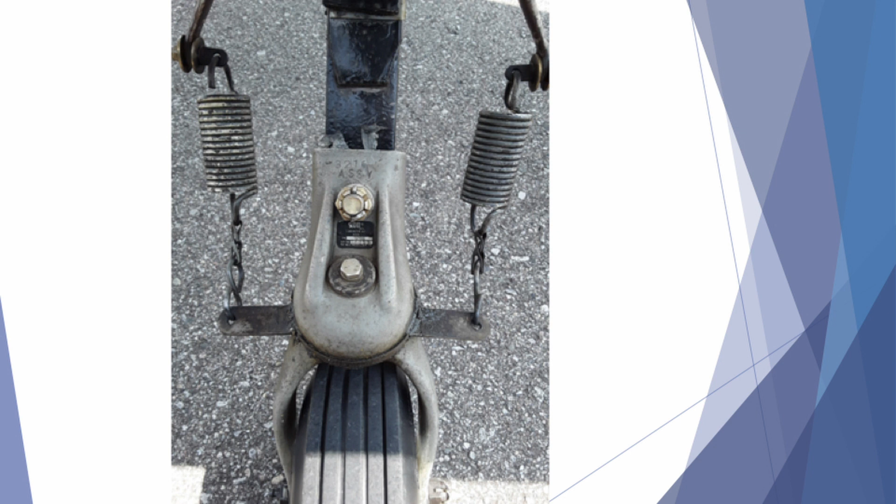Okay, tail wheel. If you look at the parts manual, the attach point for the tail wheel shows the bolt going one direction. The service manual shows the bolt coming up, holding it together, going the other direction. If you notice, it's not an elastic lock nut, it's a castellated bolt. That's the way it's supposed to be wired, and that's the way it's supposed to be installed.

You notice there's no grease zerk on this one. The grease zerk, if you take a grease gun and keep pumping grease out of it, the tail wheel's never going to lock straight for you. It's always going to kick loose. What we did is about every second or third annual, when it's up in the air with the tail wheel suspended, we'll take that off, clean it all out, put a thin film of Lubriplate on the little clutch plates, the friction discs, put it back together and tighten it up, and it's fine.

It doesn't need to be greased every year until grease is coming out of it. It doesn't help it. The chains and the springs should have a little bit of slack in them when they're sitting stationary. They shouldn't be under tension.

That'll give you about 15 degrees of travel with the tail wheel. Any more than that, you get full right rudder and tap the brake, you'll kick it loose into caster mode. If you've got tension on it all the time, you've got a preload on it and it'll break loose even easier, and it's a real bear in a crosswind. You don't want them tight.

So the rudder horn for the spring attach points, how were they set up initially? Did the springs hook directly onto that? The springs originally went up - see, I've got the eye bolts coming out of it, moving it in. All I did with mine is I got a little too carried away with it and I changed the steering ratio, so it kind of desensitized it. It's more of a linear push travel now.

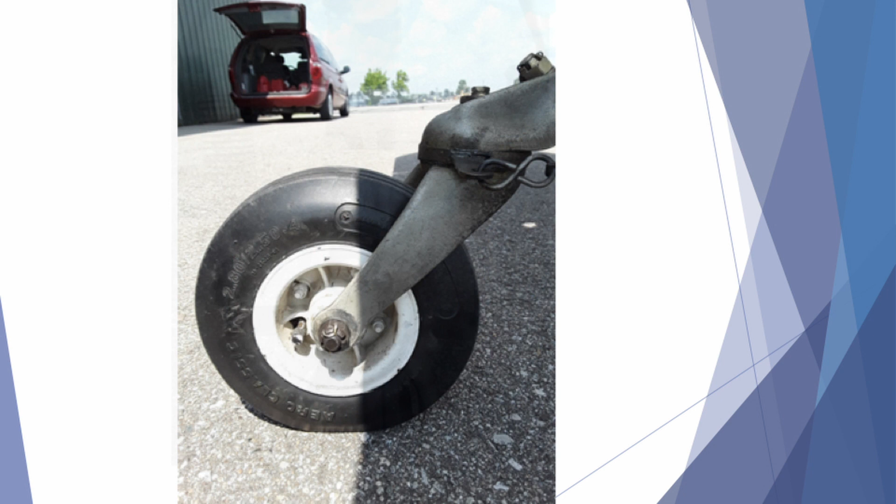Aero Classic makes that tire. It's almost a necessity for the Dash 3s with the big heavy tail - they've got a lot more weight on the tail sitting on the ground. If you drop a Dash 3 in with the old sawtooth pattern tires, you can pretty much guarantee you're going to blow the sidewall out of it, or if you let the pressure get down below 45, 50 pounds. These tires on a small tail, you could almost let the air out of them and use them. They're a much, much more durable tire.

When you do the annual on the airplane, you want to jack the tail up in the air where the tail wheel's hanging, where the tail wheel spring pushes up into the rear of the fuselage. There's a steel box in there, and it's a good jack point. Take a hydraulic jack, or have somebody lift it up, and put it on a little jack stand to get the tail wheel up in the air.

At that point, you can start shaking it side to side. With the airplane sitting on the tail wheel on a load, you can't tell if anything is loose back there. By putting it up on a jack stand and getting the tail wheel in free air, you can see if the bushing is worn, the bolts are loose, or the rubber coupling that goes up into that box. I've seen cases where guys took them apart for an annual and never even knew the rubber was gone — it's got a quarter-inch gap in there slapping around. That's a real son of a bitch to replace. It's not fun, yeah.

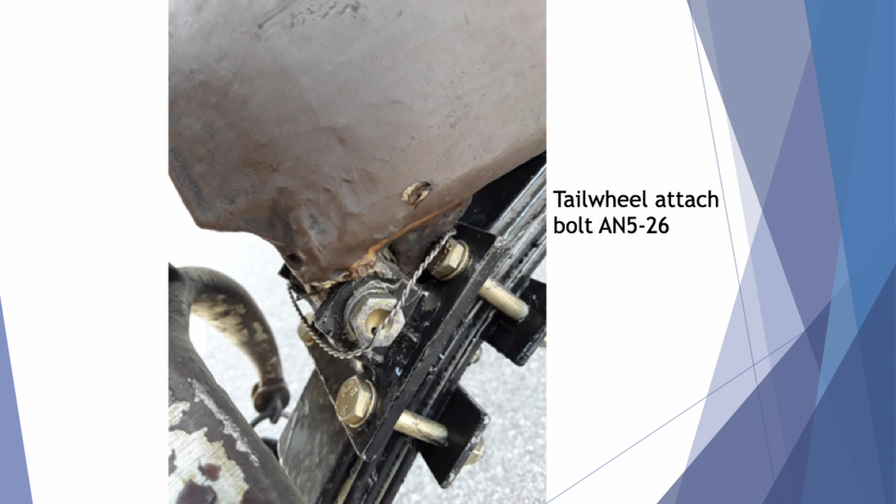Okay, the rear bolt — it's an AN 5-25 in the parts manual. What we found, whether that was a typo or something has changed, is that a 5-25 is real tight; it's not quite long enough. If you put a 26 in it, notice it doesn't have an A on it, so it's not an elastic lock nut type bolt — it's supposed to be cotter pinned. It's got an AN 310 castellated nut on the other side.

This is something I came up with on them years and years ago after I broke two bolts. I noticed you've got bolts with a plate, whereas the airplane that crashed initially had U-bolts. Yeah, this is a very, very early 108. Through the years, things have changed in them, and there's a lot of parts up in the wing that are completely different between an early 108 and a Dash 1 and 2. We'll get to that in a little bit here.

Now inside that bolt, there are two sleeves — an inner and an outer bushing — and a 5/16 bolt that goes through there. Guys will put elastic lock nuts on them and start reefing down on it if there's a little bit of play. That's not the way to fix it, because you're trying to squeeze a quarter-inch steel plate. The bushings are set up so that if you buy a brand new bushing from Univair, it's a little bit too long. Guys will grind them off, but no — that's where you put the shims.

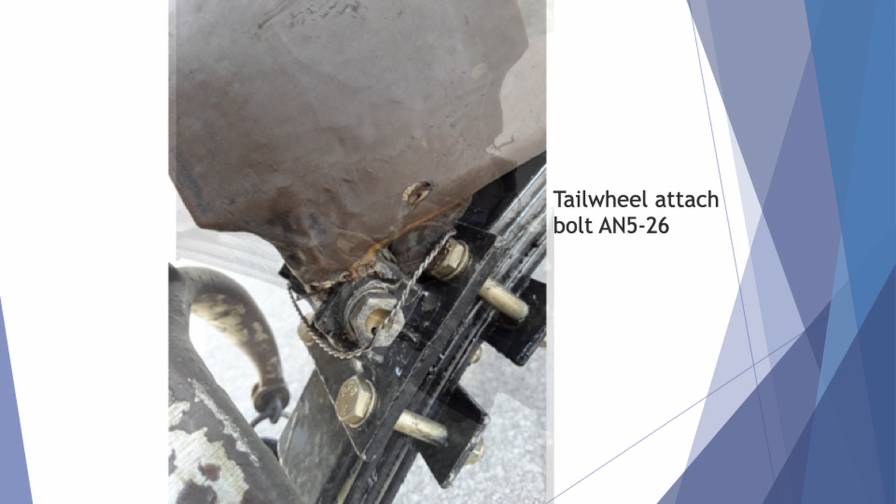This is the other side. The trick we figured out was you drill the head as well. Instead of putting a cotter pin in it, you come off the tail with safety wire, go all the way around the loop, through the head of the bolt, come back around, and safety it back through the same hole. So now you've captured that bolt.

If you're out somewhere and you snap the head off that bolt from a real bad crosswind taxiing — picture that 5/16 bolt, and you're trying to taxi a 108-3 with all that side load on the tail. It's all being transmitted to that little 5/16 bolt. If you pop the head off, there's nothing stopping that bolt from coming out the other side. When that happens, your tail wheel leaves. By capturing it with the wire, you'll catch it on a pre-flight. If you break the head or the tail of the bolt, the safety wire will hold the remaining portion into the bushing, and it won't come out.

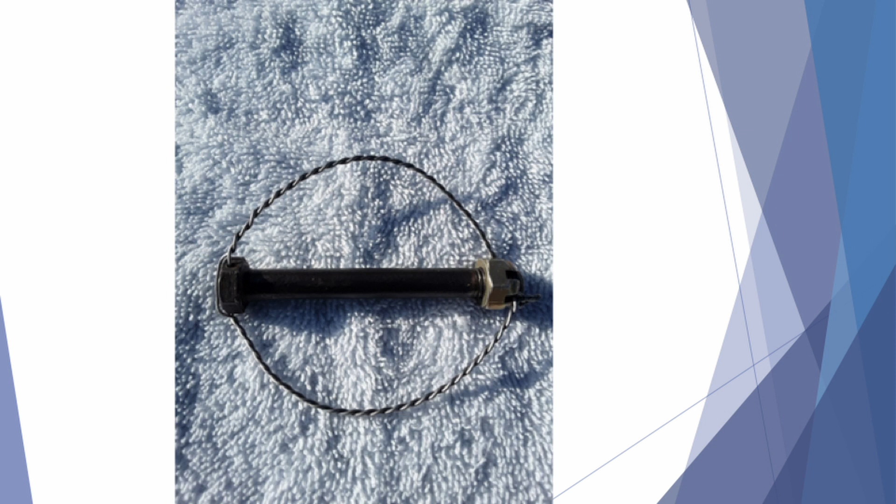That's what it looks like off the airplane. I've got one up here. You guys can come look at it after the presentation. It'll give you an idea how to do it.

It's like Murphy's Law - if you safety it, double safety it like that, you'll probably never break it again.

This is the weak link that nobody ever looks at, the flap return spring up in the wing. There's an inspection hole underneath the flap bell crank frame, and you can look at it.

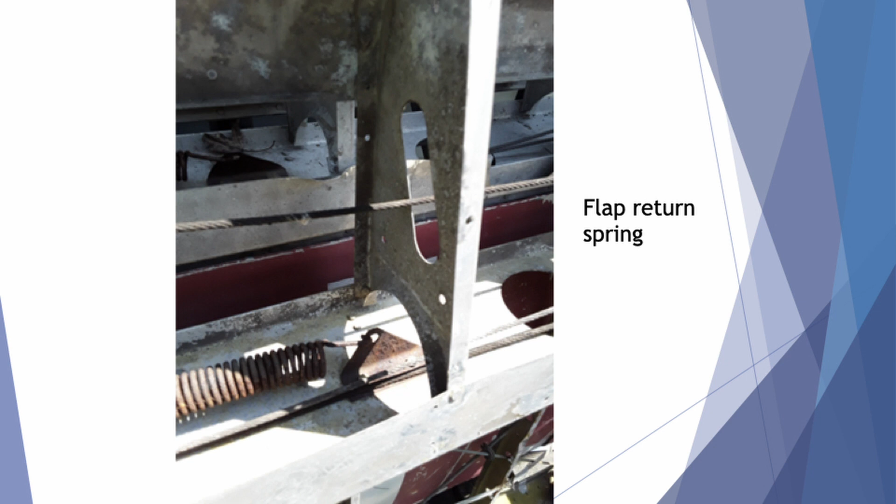Who's got serial number 183? Okay, mine's 185. The very early 108s, the other end of that spring, the flap bracket, was welded up out of pieces of steel tubing and plate. The later ones, from a 1 all the way up to a 3, used an aluminum forging.

And they figured it out in the straight 108s. The outer point where that spring goes in, it starts chewing away. It's metal, steel, and it elongates that hole and starts wearing through the spring. That's something to look at when you get to the end.

This one is really, really hard to find. That measurement point is exactly 24 inches in from the root of the wing, ahead of the flaps in that tapered area. Nobody ever puts an inspection hole in there.

So the only way to see that inner hole - you can see it, that one's the wing that was just taken out of service, but you can see how elongated that hole is. Nobody ever looks at them. The only way to get in there and look at it is with a borescope.

Or you can cut an inspection hole. If you find one that's worn out, you're going to cut the inspection hole back there anyway, because that's the only way you're going to get a new spring in there.

Is that on all 108s or just the early ones? All 108s have that - it's a steel bracket, attached behind the spar, behind the gas tank. The other end of it - is that on the back side? Yes, that's on the back side, behind the fuel tank.

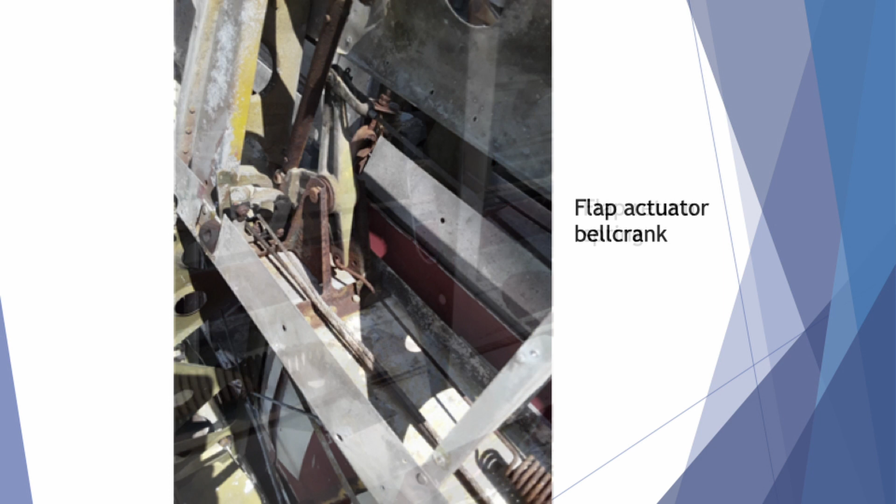Okay, this is on a Dash 2. That's the flap bell crank. You can see the other end of the spring in there. If you look close where that spring goes through that forging, there's a bushing in there. So even back in the 40s, Stinson figured out that it was going to be a wear point.

There's usually an inspection hole to get in there and shoot some oil in it, lube it, and make sure the cables aren't frayed where they go through the guides.

The lower wing strut attach point cluster - if you're going to get in and do an annual on the airplane, take a real good look. That's an area that's susceptible to corrosion.

There's been a lot of them that guys have found after they bought the airplane. When they finally open it up for an annual, they never looked at it before they bought it, and they find out that cluster is all rotted out.

If the airplane's been looked after and it was primed and dealt with accordingly when they recovered it, it shouldn't be an issue. But if the airplane's been left outside in the dampness and the weeds, you're going to get corrosion in that tubing.

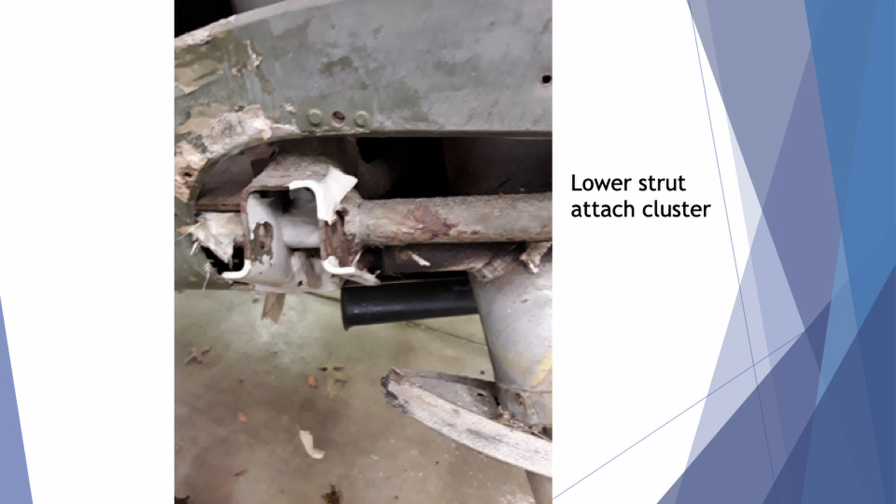AD note on the rudder cable pulleys. The original pulley was 2 inches in diameter, an AN 210 part number. There's the Piper service bulletin.

We get back to the same thing - all this supersedes the manual. The AD note refers back to the service bulletin for compliance.

An easy way to tell the difference between them, other than getting in there with a tape measure, is below the bolt - you can see where it's got that little chamfer. It comes down and then loops around the back side. It's a one-piece captured pulley. You can't drop the pulley straight down when you pull the bolt out; it's got to slide forward or back to come out of the slot.

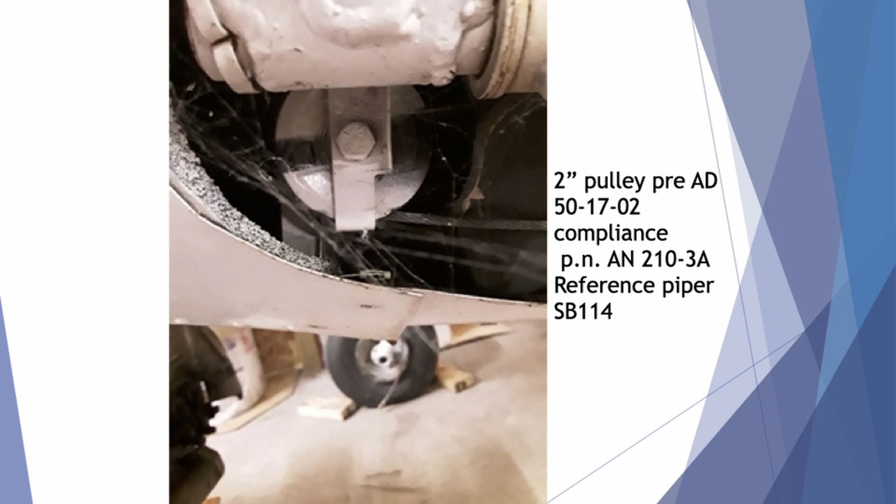Once the pulley has been changed to the new style, you cut that lower section off. The new pulley, the Piper part number is there, and it uses two SK253-2 guards. They bolt under the head and the nut of the unit, sandwiching it on there, and it's a 2.5 inch diameter pulley. The larger diameter pulley had less tendency to fray where it went around a tight radius.

When you're doing the annual, the best thing you can do while walking and crawling around in the hole looking at cables is take a clean rag, soak it in engine oil, and wipe the cables down. Run them away from the pulley, away from their natural sitting position, and run the oily rag along there. If there's any fray starting, you'll catch it on the rag and won't rip your hands open. It's a good way to find frays that are starting.

We've seen them all over. We've seen them there, and another spot is up in the corners behind the rear cabin where the aileron cables go up into the fuselage. The aileron cables, in front of the yoke, where you've got your two pulleys and your crossover, we've seen them frayed in there. It's not a normal area to wear, but you have to realize these things are 75 years old, and a lot of these cables are still original.

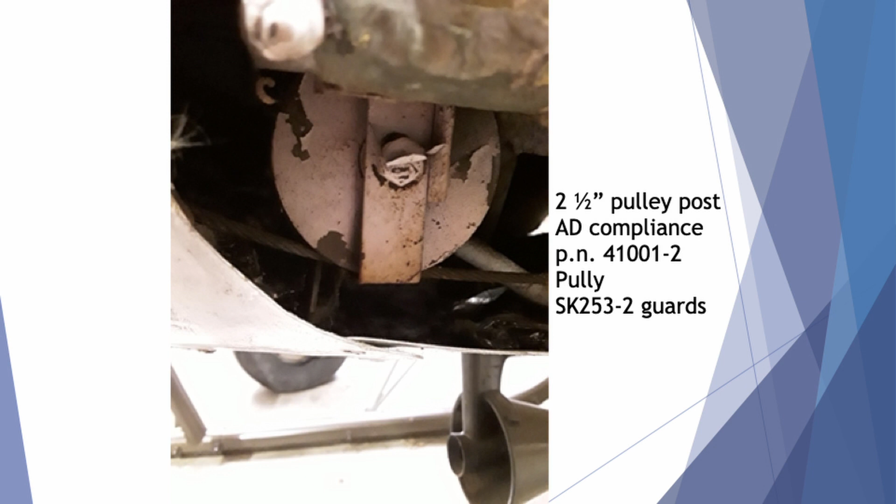Landing gear fairing bracket. I've got one up here you guys can look at after. The gear leg fairing bracket, if you fly strictly off a paved runway, holds up pretty good and doesn't break a lot. If you fly off unimproved strips, it's just about guaranteed that when you pull the lower landing gear strut cuff off and look, one of those legs is going to be busted. Univair still sells them, it's just a given.

Welded, patched, about 20 years ago I got tired of doing that and repaired mine. I used stainless steel worm gear clamp material and three floating number 10 box nuts, and duplicated it so now it's not rigid. I haven't touched them in 20 years now, so that cured it. I've got one up here if you guys want to take a look at it after. You're not manufacturing a part, so you don't worry about PMA, you're repairing it, using the existing clamp. I just repaired it and put better legs on it.

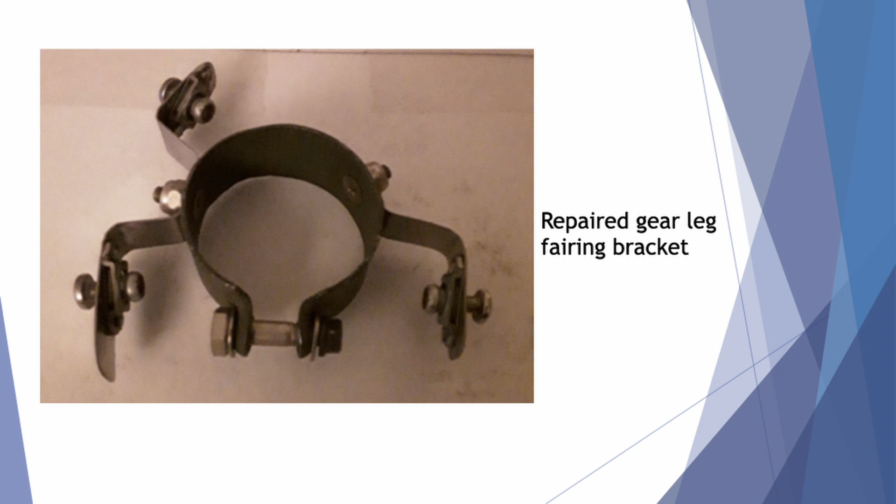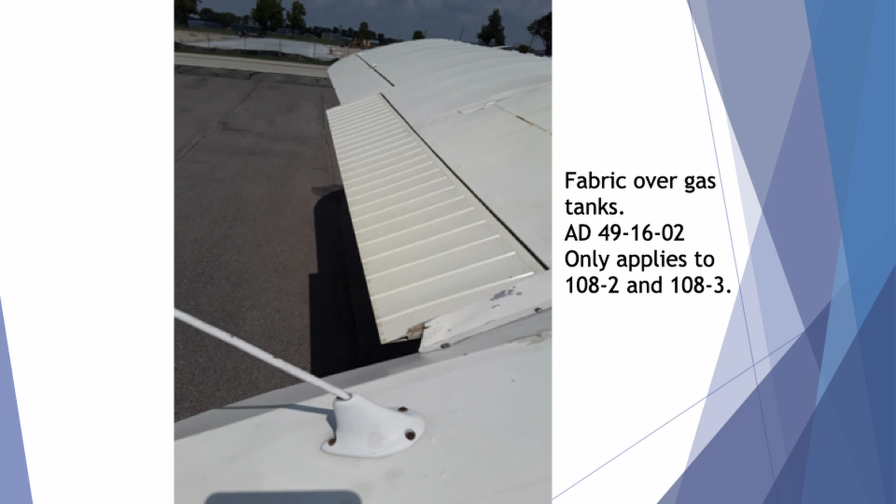That's your extended flap, right? Yeah. And it's legal. Is that field approval? Yep. How much of a difference does that make? Huge, we'll go over that after. Let me get through this.

The original breather hose coming off the engine was this spiral perforated stuff, and it was really good except it's porous. So you get all this oil drizzling down the back of your engine and you can't find the oil leak. Run your hand along the bottom of that aluminum tube and it's going to be wet, that's where the oil comes from. That worked really good as a blast tube for the generator, but that's about all.

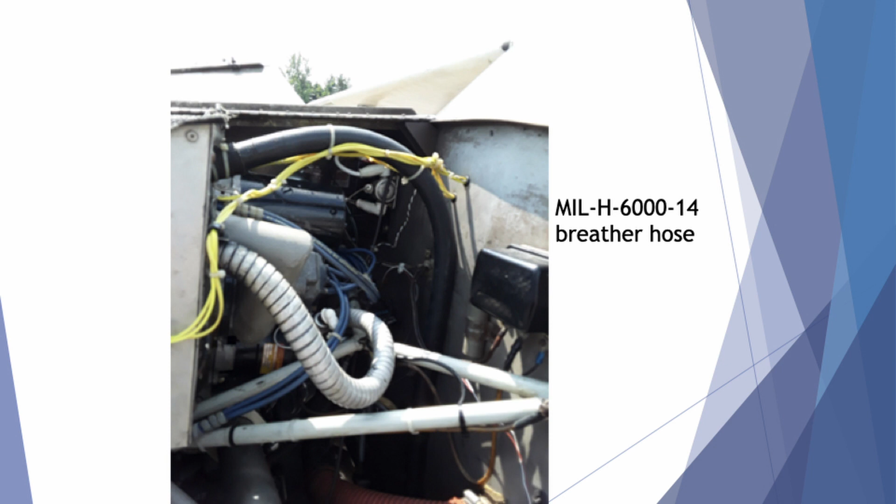That's the best breather hose. It's MIL-H-6000-14, 7/8 ID.

The other trick with it is when you come out of the breather cup, come through here, a lot of guys will dump them right down as quick as they can. If you get that up, that arch as high as you can until it just touches the cowling, you're going to eliminate a lot of the blow-by that's going down the belly because the oil's not going to run uphill to go out.

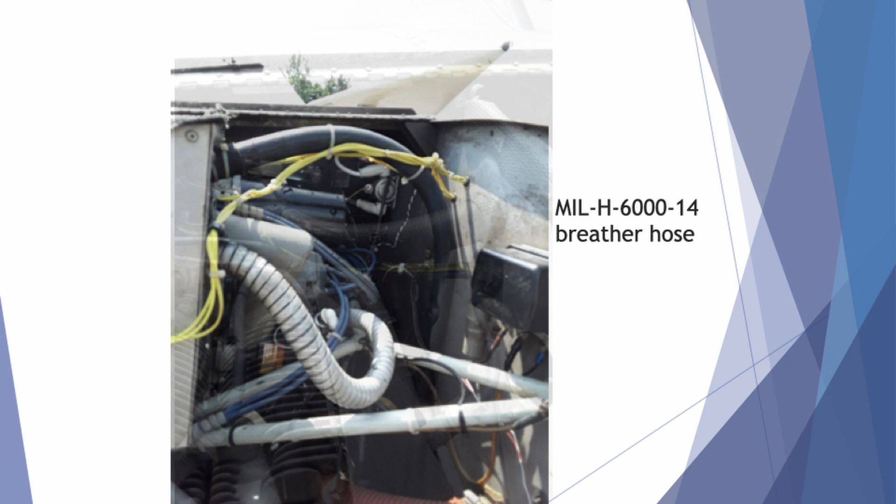That's forward of the engine bay. That's that MIL-H-6000, 7/8 hose. You can actually see where it's coming out of the breather cup and it's already going uphill.

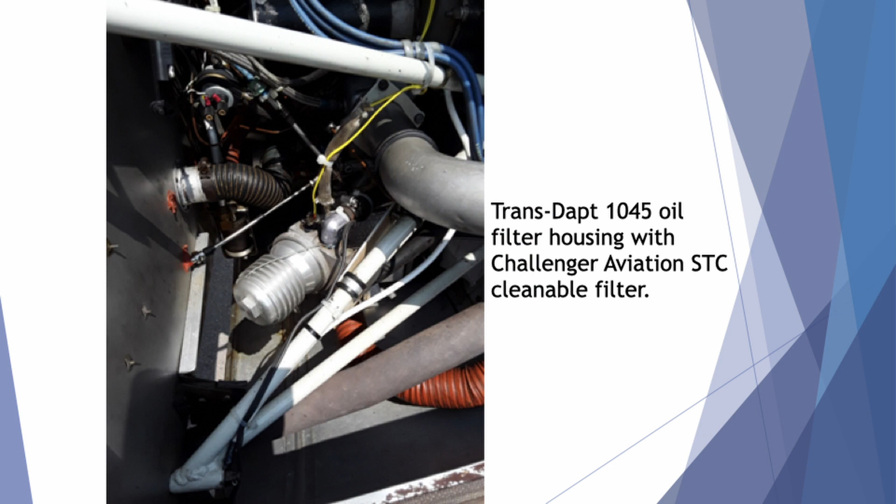That's the Trans-Dapt oil filter housing. That was done, I don't know how many years ago, before Airwolf was in existence. It's just a standard race car housing. We did a field approval with it.

The Challenger aluminum oil filter is one that I put on about 6 years ago. Now the Champion filters are up to $35 with shipping by the time you get one. If you change the oil every 25 hours on a Stinson, that gets pricey. So I bought the Challenger adapter. It spins on, and we did that with a field approval.

You take it out and clean it as many times as you want. It's got a real fine mesh stainless screen in it, plus some high capacity Alnico magnets cast in the inside, so any ferrous metals will stick to the magnet. You take it out and clean it off with a can of brake cleaner, put it right back on. That housing is less than $300, so it doesn't take a lot of oil changes to pay for it.

Dave brings up a question - the Tempest oil filter, I was always under the impression that they had a magnet in there. I ripped mine apart and found out there is no magnet in there. No, no.

Originally, my airplane had a 35 amp battery under the pilot's seat. Way back in the day when you used to put acid in them, that was about the dumbest place you could put a battery in the cabin. They went to the sealed Concorde and Gill batteries that helped.

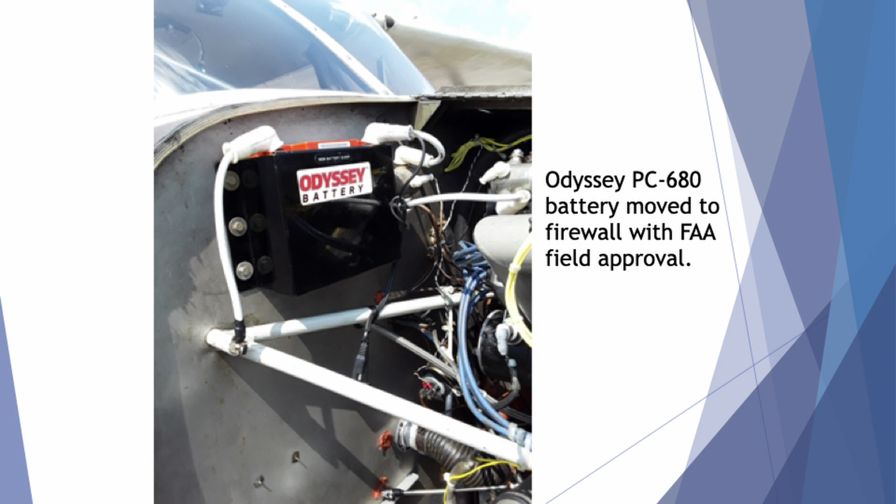Got to put a little chrome on it, it's got to look good. Yeah, it's 5 knots, right? Or more.

This is the engine that we were talking about earlier. The 210 horse Franklin engine came out in '57 for the Bell and the Hiller helicopters. If you can find one, there's a whole bunch of really, really good parts that'll fit the 165s in it.

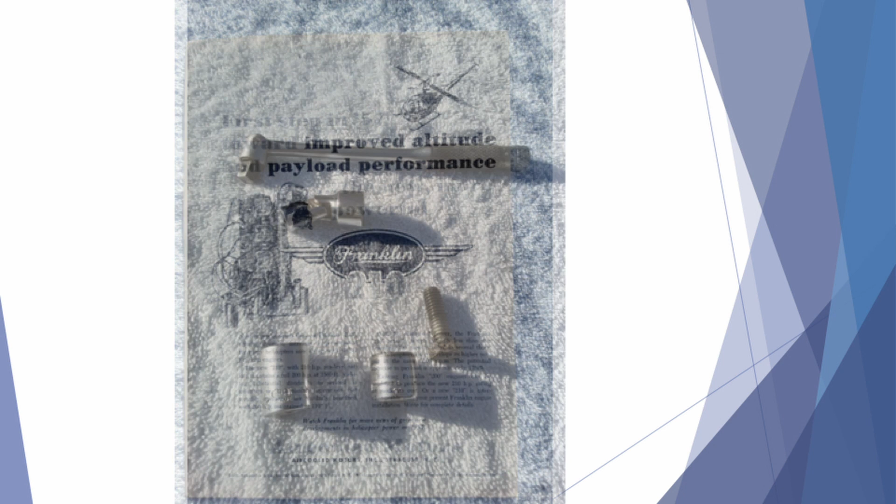Okay, tools. You're only going to need a handful of tools. Frank Bailey did a really, really good job manufacturing replacement Franklin tools, but he's not doing it anymore - he retired. So there's some commercial equivalents that'll do the same job.

The flex socket's a Snap-on TMU 161, 1/4 inch drive, 1/2 inch flex socket. The ones on the bottom are just standard Craftsman 1/4 inch sockets - cut the open end down to where it just encases the head of the bolt. Those are for the intake manifold logs, the ones that are real bear to get up in there. With those two tools, you can whip them in and out in nothing.

Again, there's some up here. You guys can come look at them afterwards.

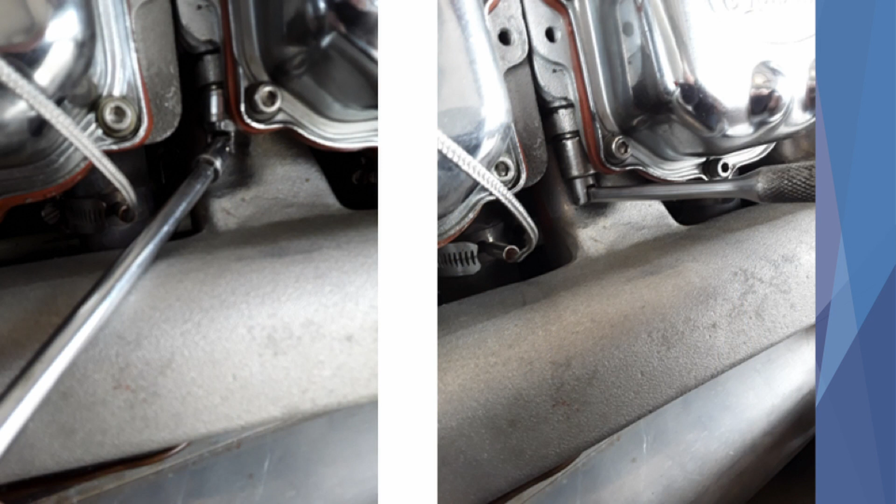That's the flex socket going up, doing the left, then a little breaker bar with the cut down socket. You got all kinds of room in there to work with them then.

Split lock washers - we'll go back to the intake manifolds. Whenever you guys change the oil in the airplane, it's a good idea to go around those manifold bolts and check them. The original washers are the ones on the right, the internal lock washers. Put one of those up under there.

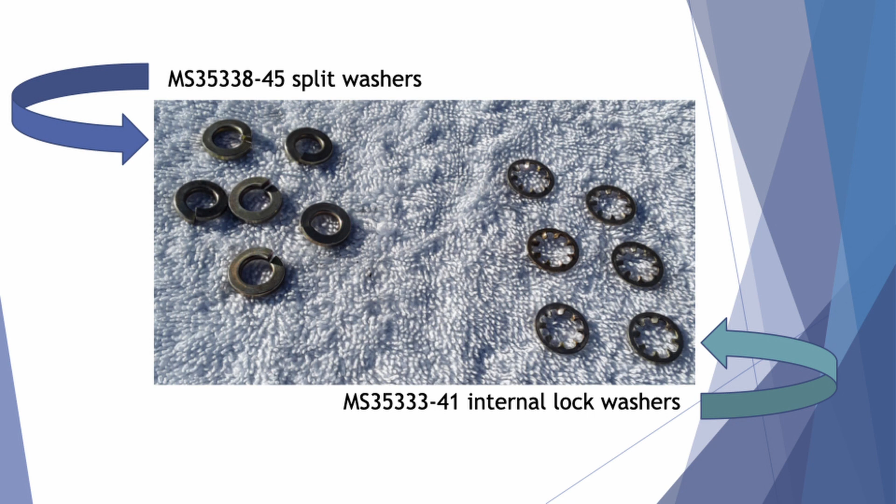These are the original factory pushrod tool installer and removals. You can tell by the complexity that they're built for the military. They work well, but they're real complex. Frank Bailey was making them for a while. They're real scarce, hard to find the original ones.

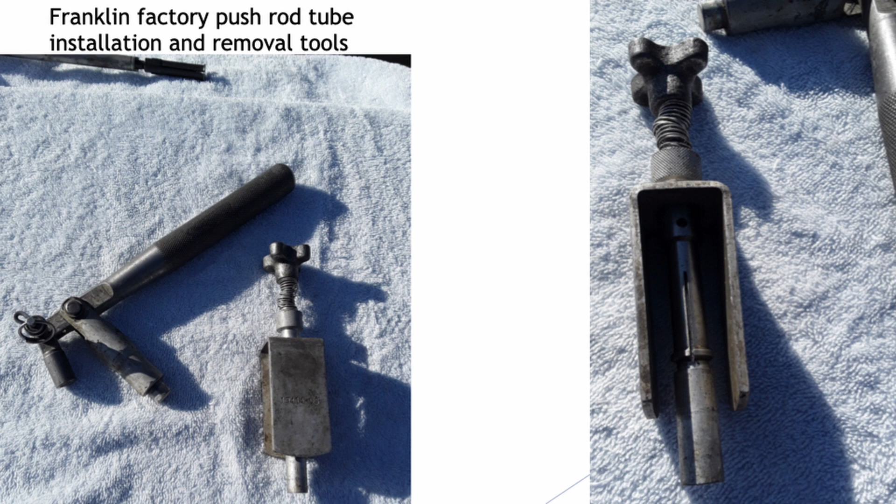This is one that I came up with. I made the split collar. You thread the rod down in the middle of it. The long tube surrounds the pushrod tube opening at the cylinder head. Then there's another nut - you thread that down to expand it into the little groove in the pushrod tube. Drop that cup on there, and then there's another nut on the top. Turn that down, and it just pulls the pushrod tube right out without damaging it.

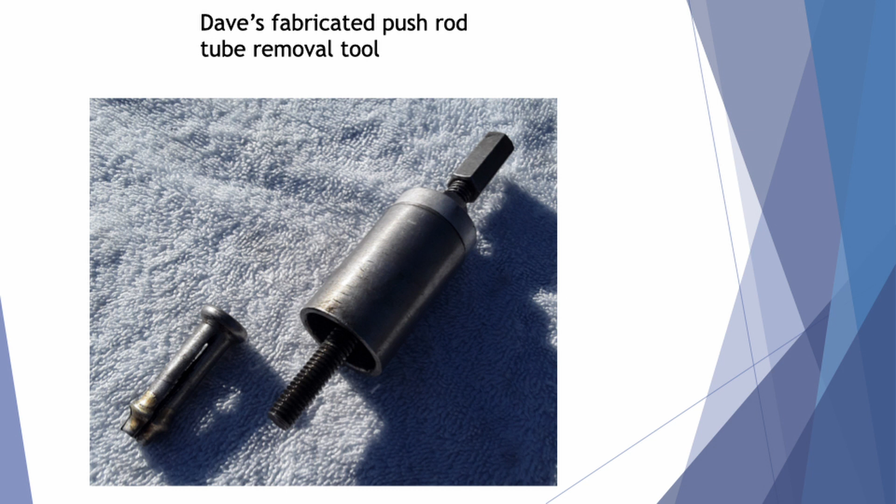We've got one of the original ones, if somebody's doing it and wants to borrow it. This is another original one that does the same job.

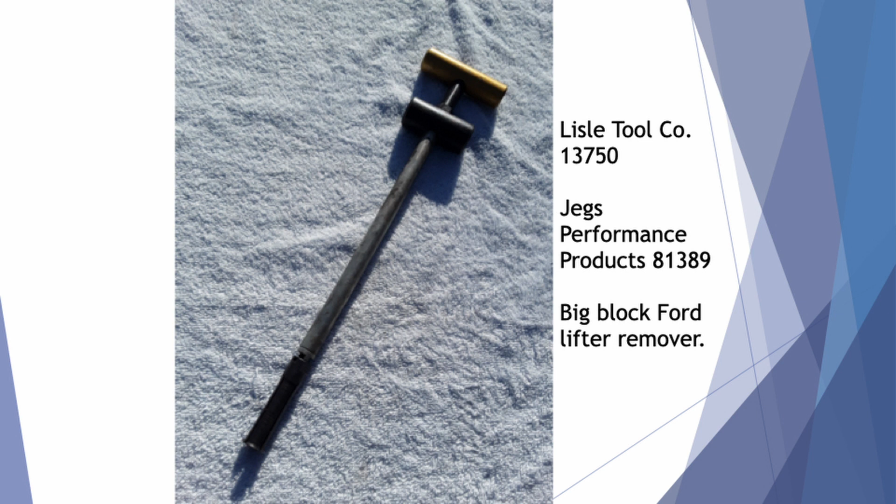There's one up here. Lisle Tool Company made it forever and ever, and it was for taking the lifters out of a big block Ford. Just happens to fit right in the pushrod tube shroud. It's got a slide hammer, you can pull it right out. They quit building it a few years ago. They sold the dies to Jegs Performance Products - that's the new part number. There's one up here if anybody wants to look at it. About 25 bucks - that'll pull the pushrod tubes out, no problem.

Top tools, the Franklin, built for the military, the original lifter bleeding tool. Real scarce, hard to find, hard to use. A 1/4 inch chain link with a section cut out, and a number 3 screwdriver does the exact same job.

How many of you guys have ever bled the lifters on your engine? Check the dry clearances. Yeah.

You don't have to do it every 100 hours, every few 300 hours, check them. What happens is the valves and the valve seats, when they wear, the valve will recess farther up into the cylinder, which lets the valve stick out through the valve spring farther, and it closes up that gap, that clearance - gets tighter. Loose is okay, tight you don't want because it'll hold the valves open eventually.

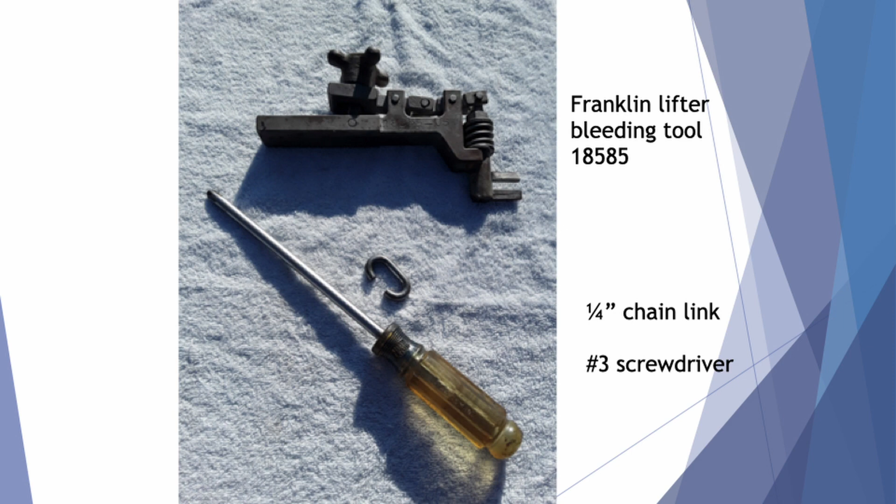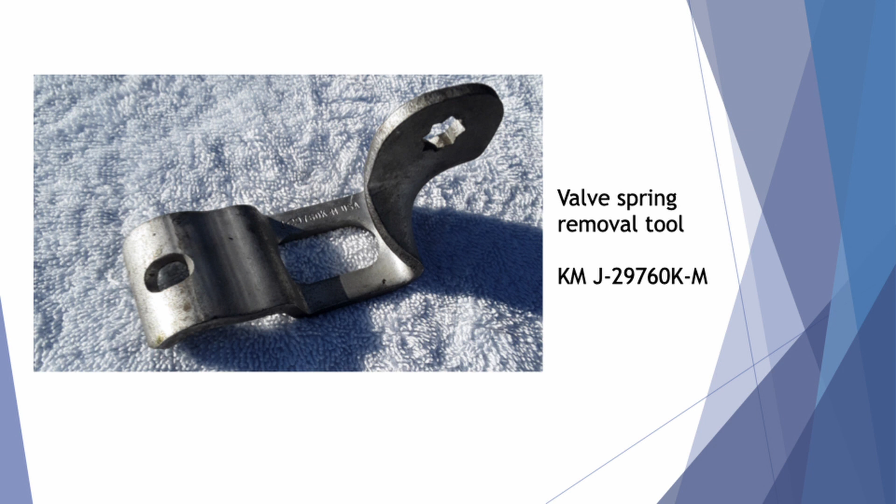Anybody's going to work on their engine pulling valves and valve springs out - this is out of a General Motors Buick V6. We just stumbled onto it. That's the part number, it's KM Tools, Kent-Moore. Current production, you can buy them, 15, 20 bucks.

Put a 3/8 breaker bar in the star end of it. This goes underneath the head. Pull the rocker off - that goes underneath one of the 3 5/16 bolts. You push down, take the valve springs off to disassemble a cylinder.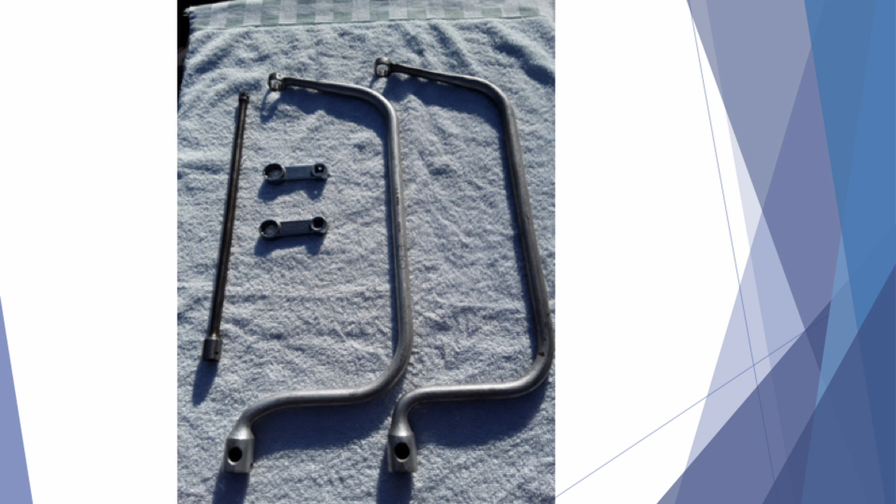On the right's original Franklin cylinder base wrenches - again, built for the military, big, complex. On the left is 2 Snap-on torque adapters and a 12-inch 3/8 extension, does the same job. Current production. That's the 2 part numbers for them - one's for the 9/16, one's for the 5/8. That's how you torque the cylinder base nuts.

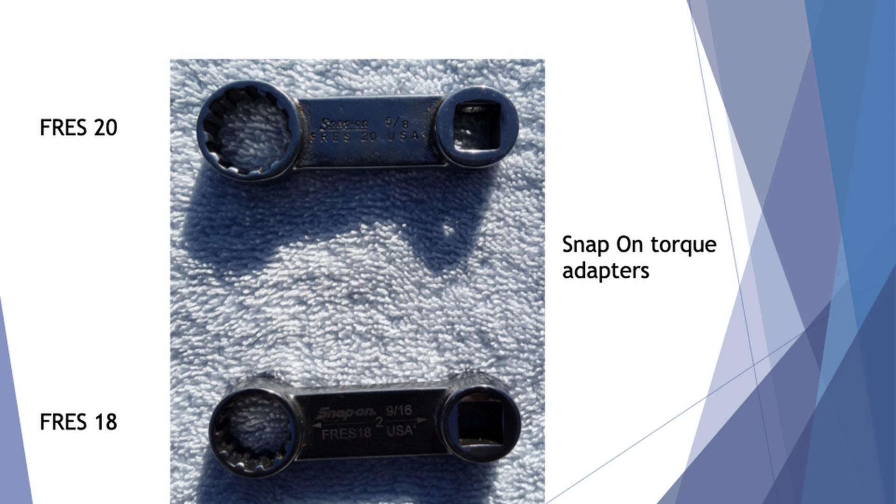The curve wrench on top is called a starter manifold wrench. Snap-on makes one, Craftsman made one too. Between that and the 9/16, 5/8 old school Craftsman box end on the bottom, you can take any of the cylinder base nuts off on a 150 or 165. That'll reach all of them.

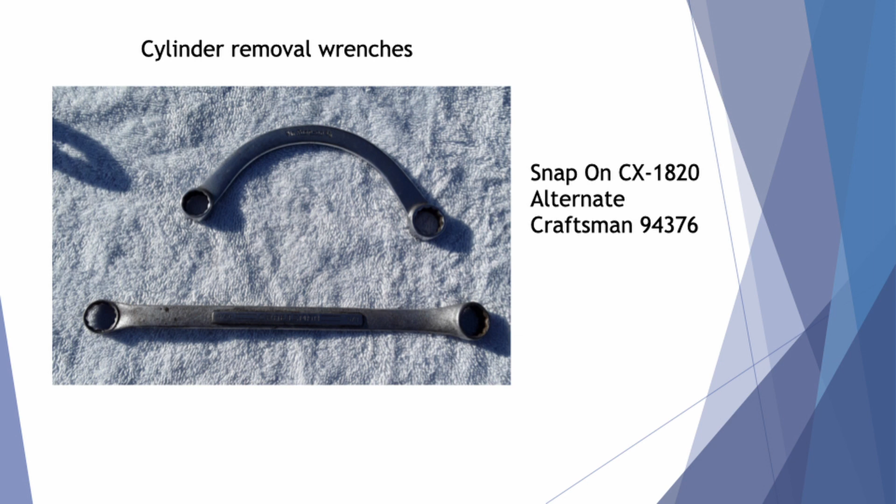Cable tensioner. Has anybody ever checked the cable tensions on their airplanes? We found this tool - they use them for tensioning sailboat wires. You can buy them in all different ranges, about $120 a tool. But you can get one that falls into the range needed for the Stinson.

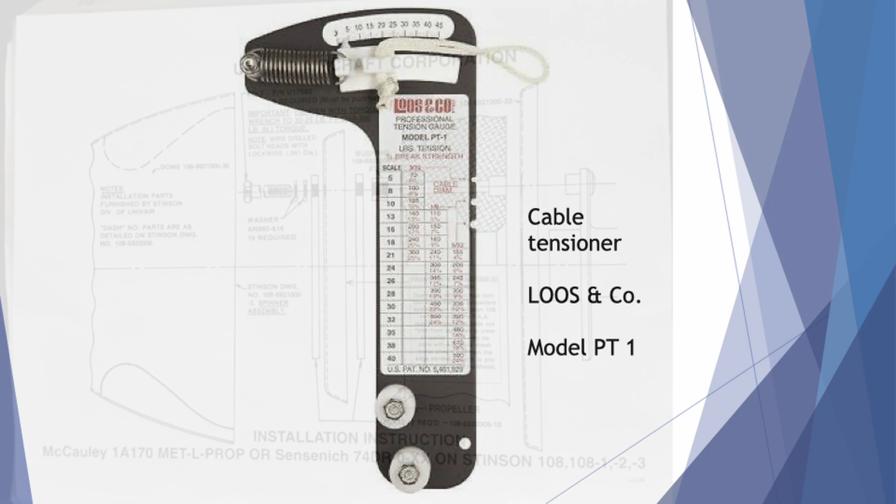Proper stack up for putting the prop bolts in. This is for the metal prop, torque is published up there. This was a revision - if you look down on the very bottom left, it's hard to read, but this document was published in 1999. The Stinson manual calls out the torque for a wood prop, because when that manual was published, that's all there was.

The early version of this document from Univair called out for .051 safety wire to safety it. That's like baling wire, trying to twist it with a pair of twisters - you got over 100 thou with 2 strands. So they revised it, and the new '99 published version calls out for .041 safety wire.

Yeah, you spin it good enough, it'll smoke.

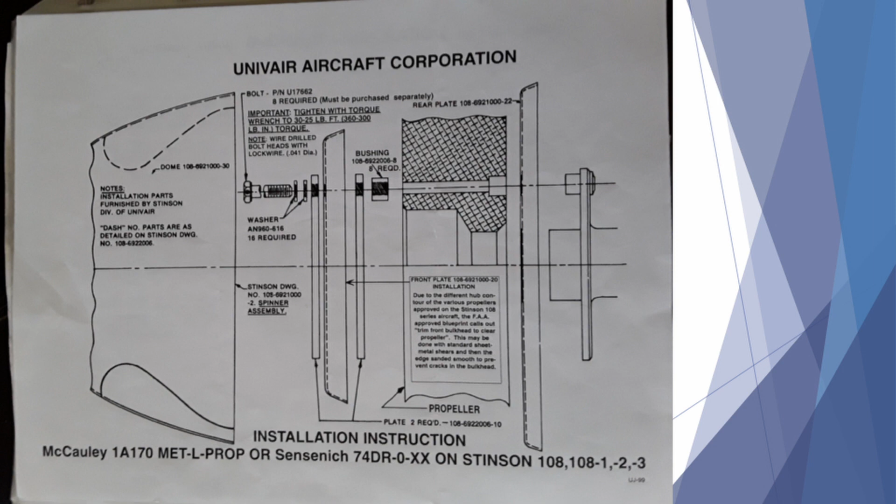This is off one of the publications that Univair sold. This manual is a copy of some FAA specifications, STC list, and AD notes pertaining to the Stinson airframe. While periodic attempts are made to include updated or new material, no guarantee is given or implied that this book contains all the information or airworthiness directives that may apply to your specific aircraft, engine, propeller, or accessories for aircraft annual and periodic inspections. Please use current FAA publications.

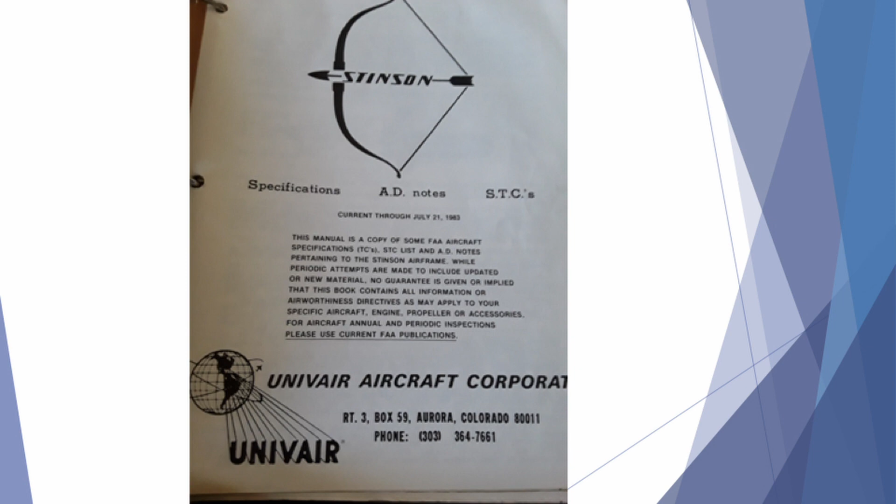That's an interesting thing - one AD mentioned a lot is the piece that goes on the wing for the drip, the drip strip. There's an AD note on the bottom of the wing for the drip strips. Should be right at the radius, at the inboard end of the flap. It should be a one-time AD note inspection - you walk up and do a pre-flight on the airplane, it should be there. What that does is stop any spilled fuel from running down into the fuselage, past the wing root fairing.

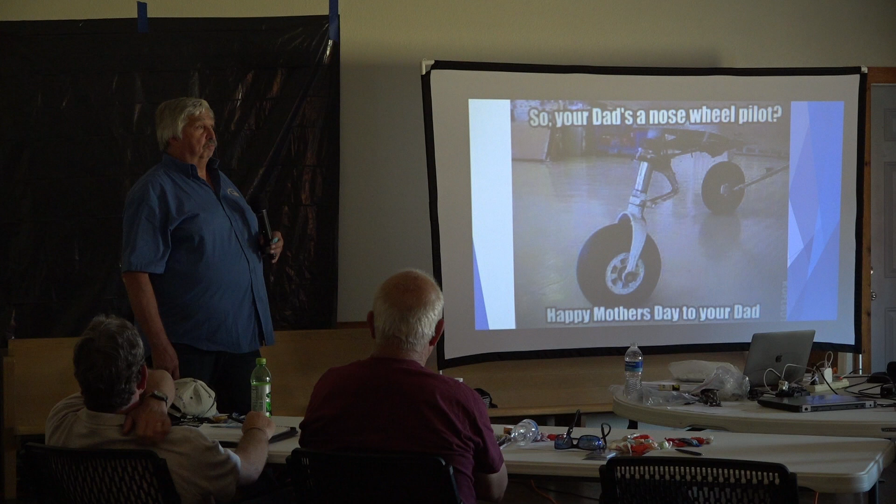A lot of the AD notes are one-time. There's really no recurring compliance on the airframe - it was all a product improvement thing. You get the one about if it's got ashtrays, they have to be the self-contained type, or you got to put a no smoking placard in the airplane. Back in the 40s, I guess people smoked in the airplanes, at the same time the fuel was dripping.

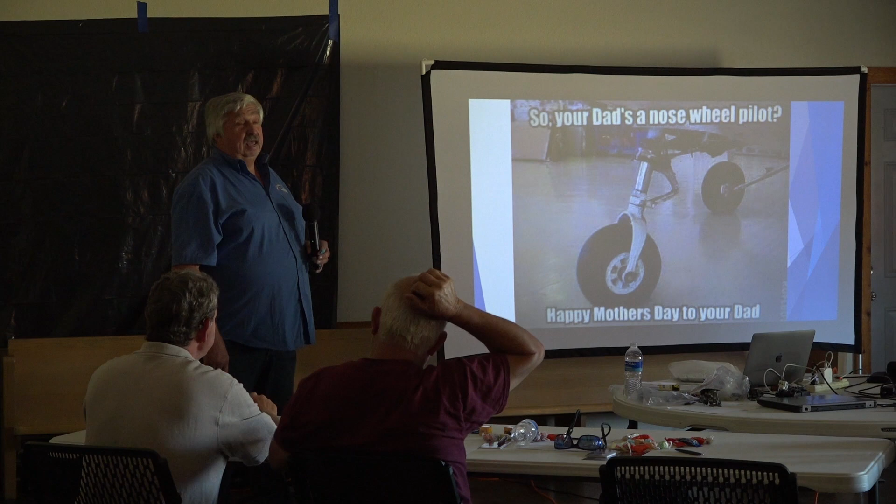Anybody got any questions? You talked about intake nuts and washers - what are you using on exhaust? Exhaust, we use the brass, and I use that same split lock washer on it, and they tend to stay put then. You use long brass nuts, not the short ones - you can buy an extended length exhaust nut that actually sticks out and buries the threads. Put the anti-seize compound on it, put the washer, then run the nut up tight. You won't get that buildup from rust on the exhaust stud when trying to take them off, and it won't try to pull the stud out of the cylinder head. You get the long nuts, run them up, and you don't see any of the thread from the stud anymore - it's buried, so it stays clean.

We had a problem where we had one side's exhaust rebuilt and they put a lot thicker flange on it, obviously to keep it from warping, but then the nuts seemed excessive - there was not enough thread on the stud. Yeah, so you probably end up having to take them out and put longer studs in.

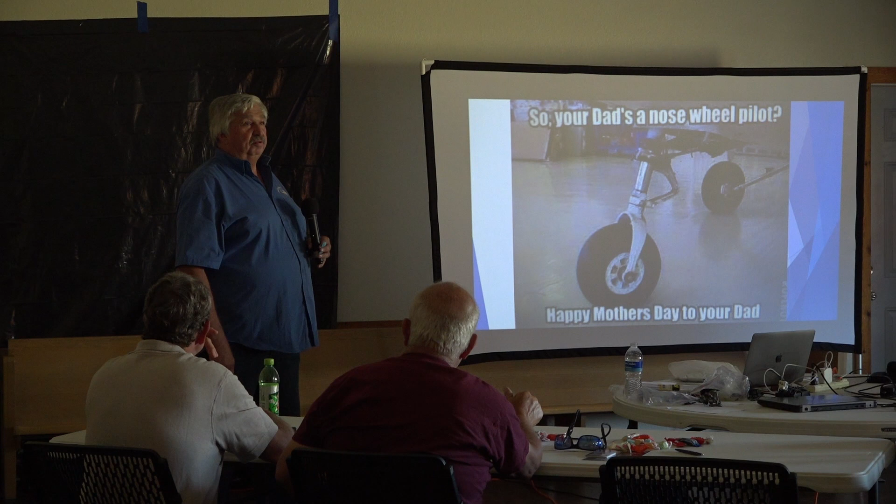Dave, will you just mention a little bit about your business and what you do? My primary is I've got a helicopter company in the Detroit area, run a bunch of Bell 47s. The Franklins I've been overhauling and maintaining for 45 years, the Stinsons probably since the mid 80s. I've got probably a dozen airplanes I look after for customers, and then we do a lot of engine cylinder overhauls for people all over the world - I've got customers overseas and in Canada, but it keeps me busy.